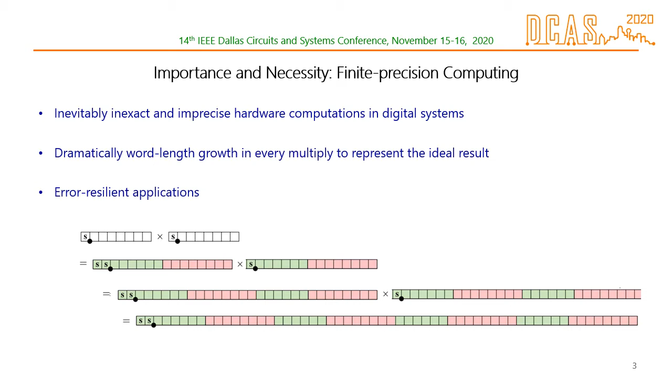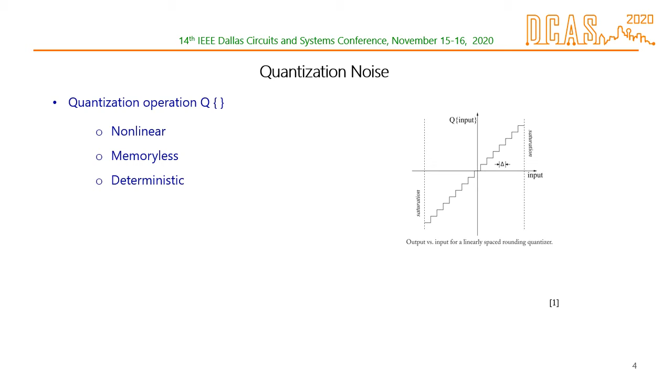Quantization is a memoryless, deterministic, and nonlinear operation. This operation converts input to represent any of the input values within a range of input plus or minus delta over 2, where delta is the quantization step.

There are 4 types of quantization. They each introduce error for different reasons and require different kinds of analysis, including overflow, input quantization, product quantization, and coefficient quantization.

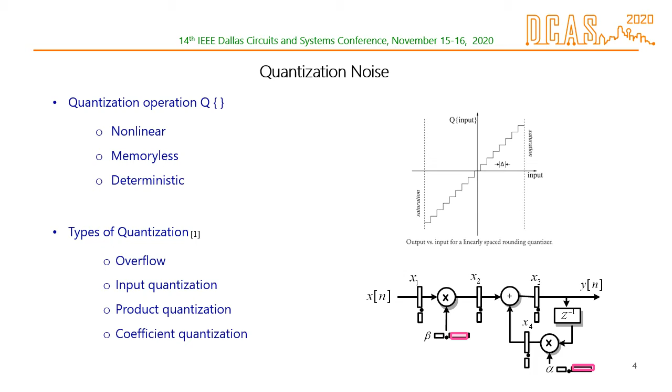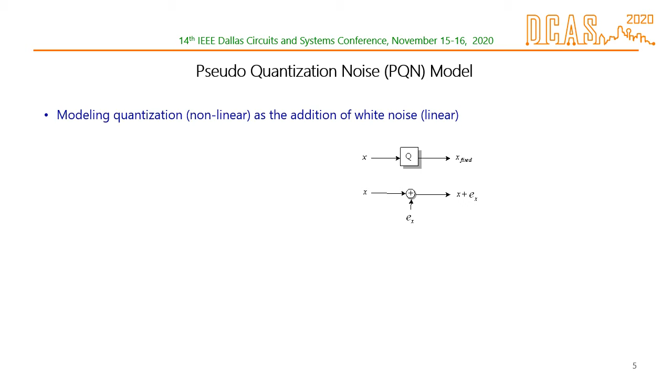Since nonlinear analysis is complicated, it is more practical to handle quantization by modeling the quantization process as a linear process. So it is treated as the addition of an error signal and approximated as a uniform white noise signal. The white noise is uniformly distributed over the range of the quantization step, uncorrelated with input, zero mean, and a stationary process.

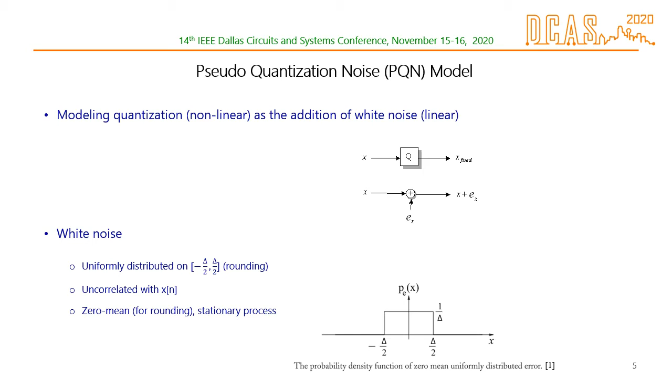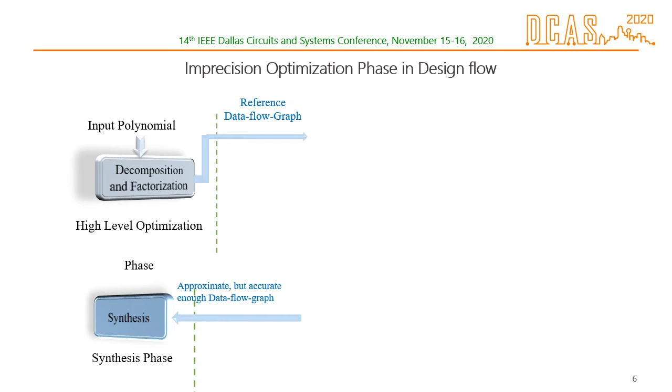The imprecision optimization phase is a high-level optimization that comes after decomposition and factorization and before synthesis in the design flow. In this phase, some bits in the integer and fractional parts are discarded for hardware reduction, such that no overflow occurs and the computational results remain accurate enough.

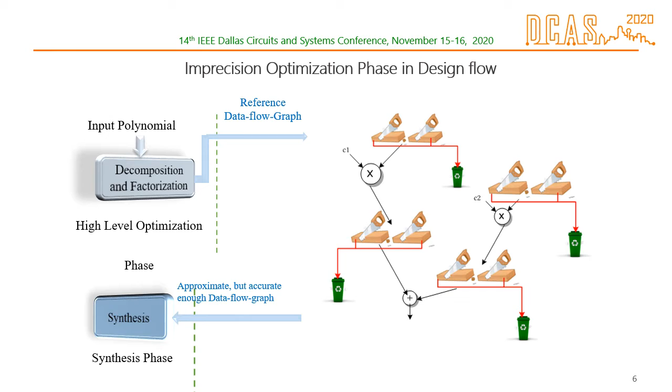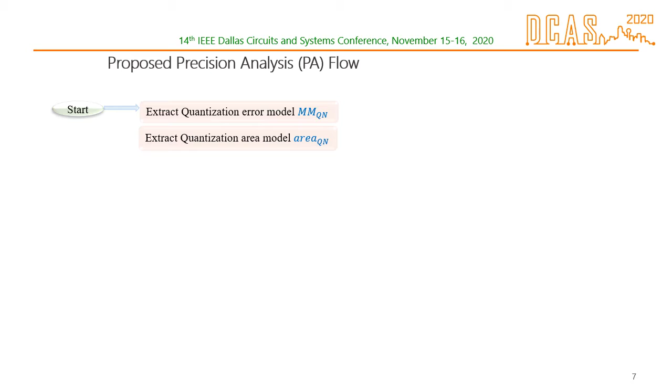Our contribution is proposing a precision analysis flow in which the proposed path replaces the classical path. The current precision optimization flow starts by extracting the area and quantization error models. Then the optimum fractional parts are obtained through an iterative process in the classical path. The classical paths mostly suffer from weaknesses such as wasting error budget and long runtime.

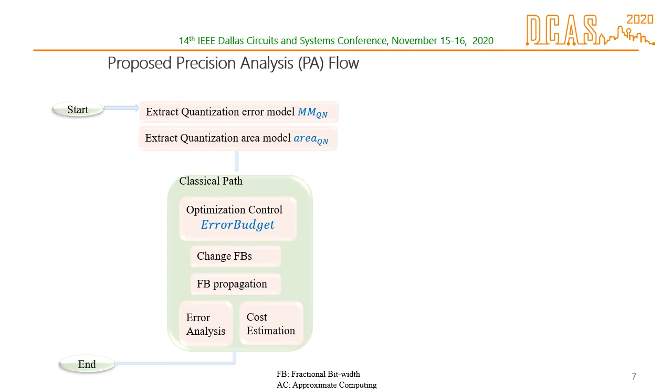In the proposed path, the fractional bit-widths are obtained through two phases: FB optimization and exploiting approximate computing. In the first phase, the optimum FBs are assigned using the Lagrange multiplier method with linear computational complexity in continuous space.

In the second phase, the inherent precision analysis weakness is addressed. This restriction causes precision analysis-based methods to not consider the entire error budget tolerable by a given application. To alleviate this, we employ approximate computing as a complementary technique, utilizing the remaining unusable error for further hardware cost saving.

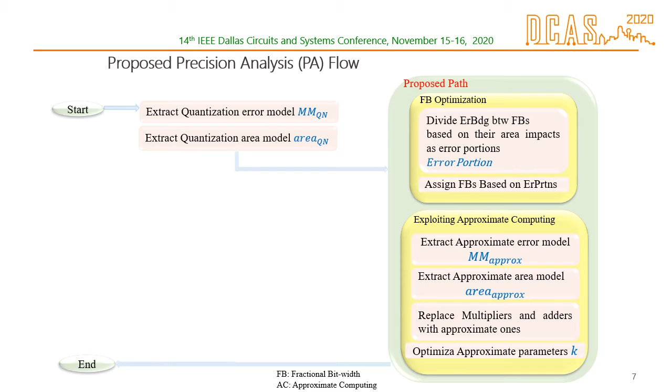In our presented FB optimization, we divide the error budget among the variables, called the error portion, based on the area impact. In this way, more effective variables on the area get lower FBs, which leads to hardware cost reduction within the allowable error budget.

Since in the LTI system the area is modeled as a linear function, the area effect is extractable from the variable slope in the linear area model, as we see.

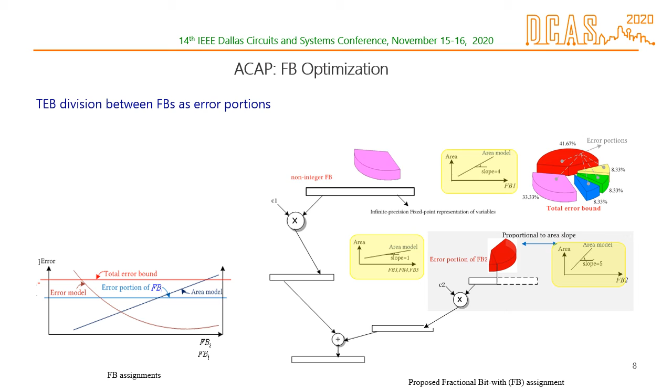The FBs are then assigned based on the portion from the intersection of the error model and error portion. By using the Lagrange multiplier method, it is proved that the FB assignment is optimum in continuous space and enjoys linear computational complexity.

Let's look at the yellow rectangle. Converting the continuous solution to discrete ones often leads to some error space, which is mostly wasted in previous works. We tried to use this error budget through approximate computing.

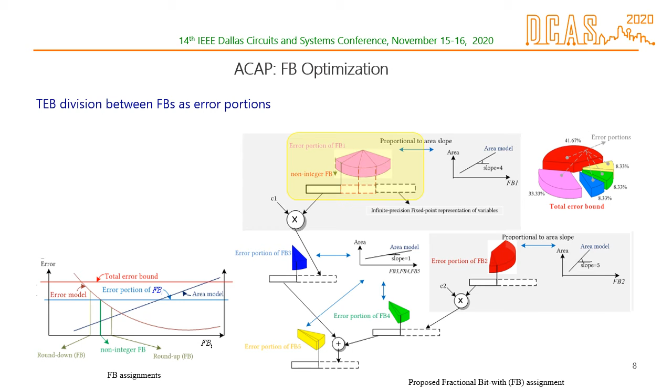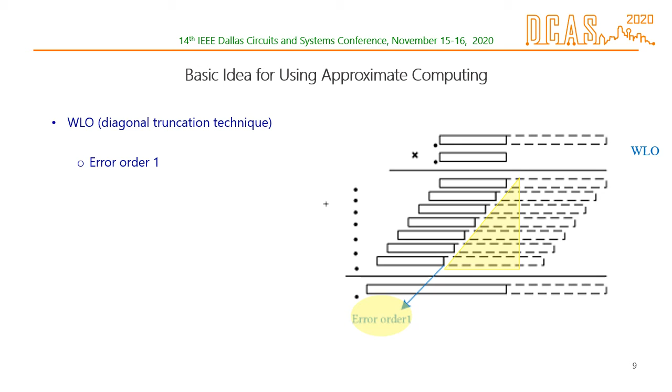For explaining the basic idea, let's consider word length optimization as a kind of approximate computing with diagonal truncation. In the higher bit, it produces an error with the order of the MSB, or error order 1. Another AC technique can be considered: vertical truncation, which generates an error with the order equivalent to the LSB, or error order 2, which is less than error order 1.

So the basic idea is that the remaining error, which is unusable in the FB assignment, can be utilized through the AC phase, or vertical truncation.

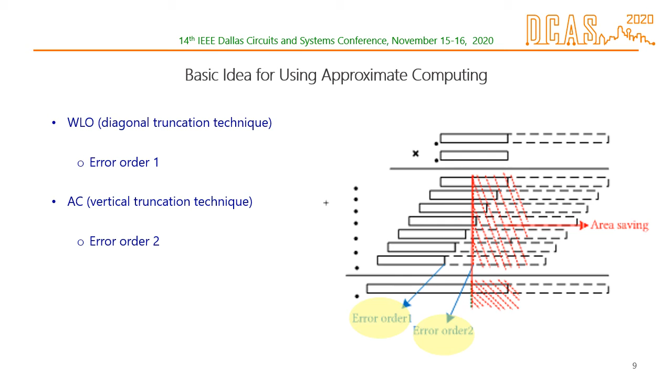Let's consider we have a portion of 0.01. The remaining error is 22 ten-thousandths, which is unusable by word length optimization. In this case, vertical truncation provides the possibility of discarding 6 units in the multiplier.

By such savings, we are encouraged to expand the error budget more for vertical truncation instead of diagonal truncation through the precision increase. So in the second figure, the multiplicand FB is increased by 1 bit.

The vertical truncation in this case provides 8-bit unit area saving. In the third figure, a 2-bit increase leads to a 7-bit saving, which is less than the previous one. So the increase doesn't always cause more area saving.

The reason is that approaching the vertical truncation error to the MSB produces an error equivalent to the diagonal error. So there is an optimum breakpoint between vertical and diagonal truncation. To obtain this point, we have modeled the approximate area and error, then a two-variable optimization is applied to determine the point.

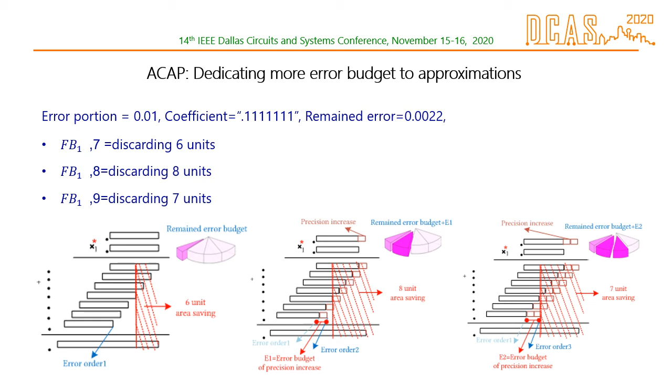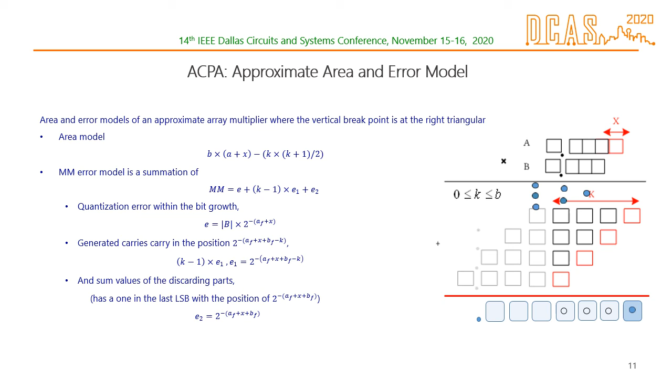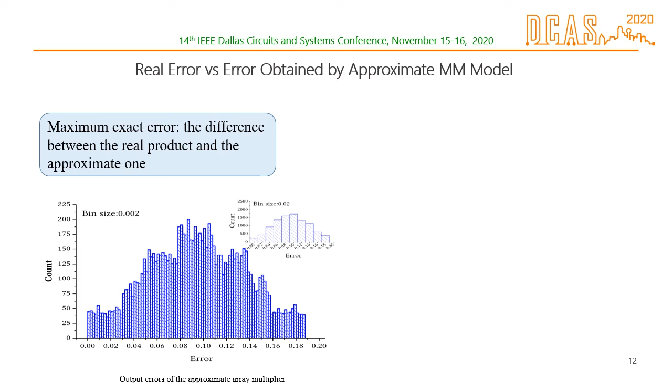The real error for 10,000 uniform random values assigned to the non-constant operand is compared with the maximum error obtained by the approximate error model. As seen, the maximum error in the histogram is equal to the maximum obtained by the approximate error model.

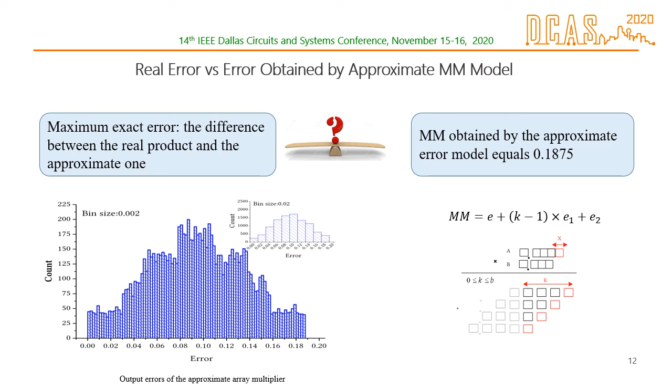The arithmetic units are replaced with approximate ones to use the remaining error budget.

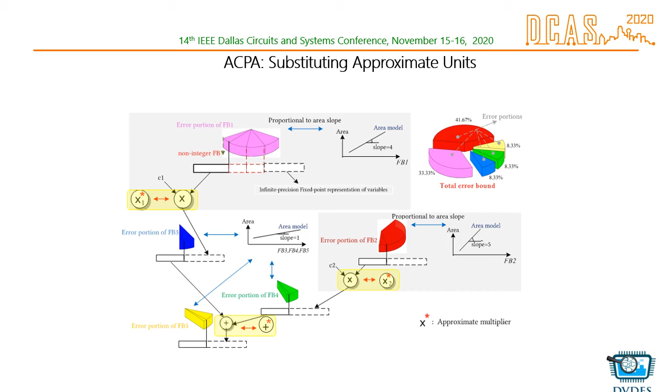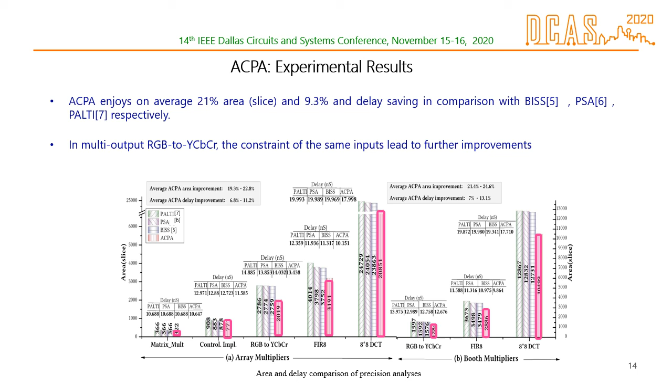The ACPA method has been compared with state-of-the-art methods applying to the benchmark. The results show that our method can improve the area by about 20% and delay by about 9% on average compared to the state-of-the-art methods.